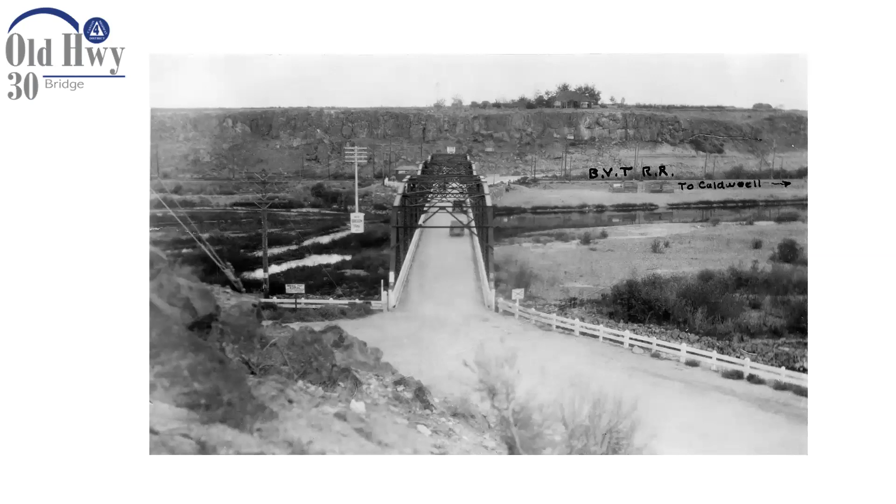I thought I'd start out with a couple of pictures. The team was able to obtain these, and this is one of the earliest pictures we know of the existing structure down there. As you can see, it has a very old coat of silver paint, and in this photo it appears the bridge has not been painted yet. You'll notice on the bluff above there's just one house and a few trees. In the background is Canyon Hill. And I don't know if you can read it, but this little sign says Old Oregon Trail. Very interesting little history here.

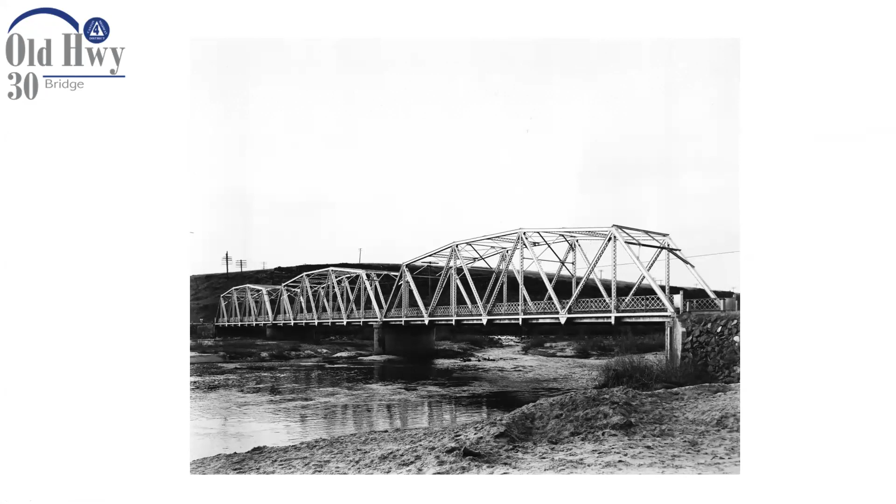Just a couple other photos - apparently they later painted the bridge, because now this photo shows it with the silver coating. There was actually a gas station down here on the curve called the Riverside Service back in the day. We don't know exactly when this photo was taken - someone with more knowledge of car history might identify the era of those vehicles, but I'd anticipate this was probably back in the 40s. Just a couple other views showing the whole valley back at that time.

So with that, a little bit about the project background. The existing bridge was constructed in 1922, so it's approaching its 100-year anniversary next year. It is what we consider structurally deficient, meaning it is eligible for replacement. We want to replace it with a new bridge to handle car traffic, but maintain the existing bridge for pedestrian use as part of the Caldwell Greenbelt system and pathway system.

I'd clarify that despite the bridge being structurally deficient at this point, it is also only used as a one-lane bridge and still can handle standard truck loading. If you're ever down there, you'll notice it doesn't have a weight limit posting, because it's still structurally capable of handling a full-size legal limit semi-truck. It is narrow, about 19 feet inside. It was originally, as you saw in those earlier photos, used as a two-lane bridge, but currently it can't really accommodate modern road width, especially with the striping we have providing bicycle and pedestrian access across the bridge to the greenbelt.

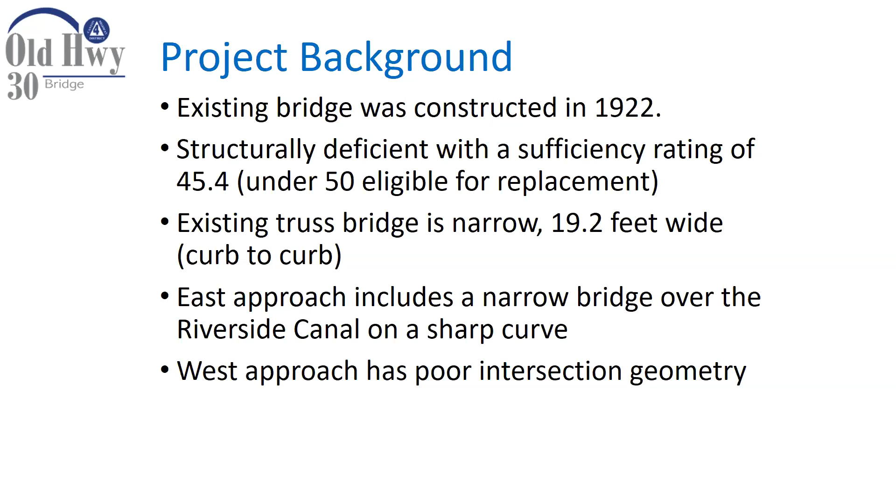A couple other issues we have with it: there's a narrow, smaller bridge on the east side, right on the inside of a curve, and we've actually had a semi-truck get hung up on that. That's problematic. Then on the west end, the way River Road comes into it is very poor geometry, and it creates problems and some confusion with drivers.

So the purpose of this project is to provide a structurally sound bridge over the Boise River, improve safety and access for pedestrians and cyclists, and improve the roadway geometry to meet current standards.

One of the other key things, especially as the area continues to grow - as many of you may be familiar, a lot of the roads parallel to the freeway system, like Overland, Franklin, and Caldwell Boulevard, are very important in carrying local traffic and become quite busy. That helps alleviate traffic from having to enter onto the freeway, because every merge on or off the freeway creates congestion, slowdowns, and conflict points where more crashes occur. So by providing a good, reliable local road system, it relieves the interstate from having to carry some of that traffic. For the future, it's an important aspect.

Currently, I think our counts on this road - last time we did them, a few years ago - showed the bridge was carrying about 1,300 cars a day, which for a one-lane bridge is a pretty significant number of vehicles.

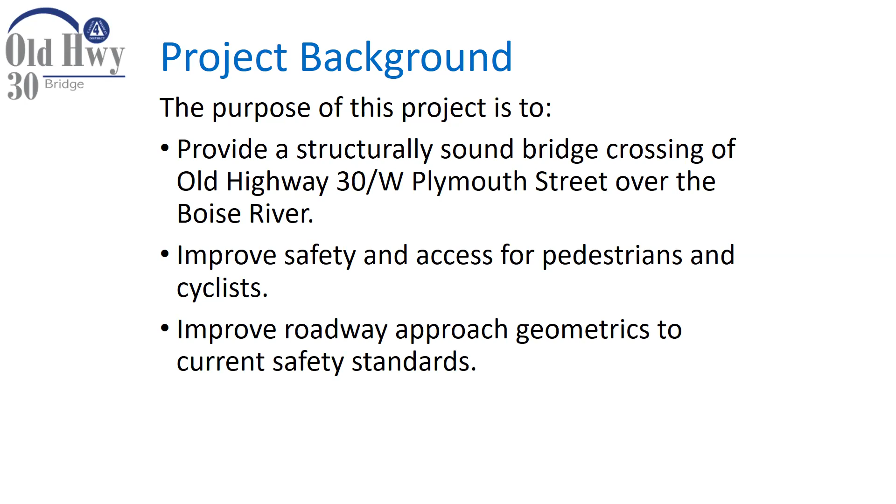The proposed project is to construct a new two-lane bridge at another location and retain the existing historic structure. It is on the National Historic Register, and our desire is to maintain that. It currently is being used as part of the Caldwell connection in the Caldwell pedestrian and bicycle path system, and we'd like to make it dedicated for that purpose. After the vehicle traffic is removed, we'll look at resurfacing it with something more friendly to bicycle and pedestrian traffic as part of that system.

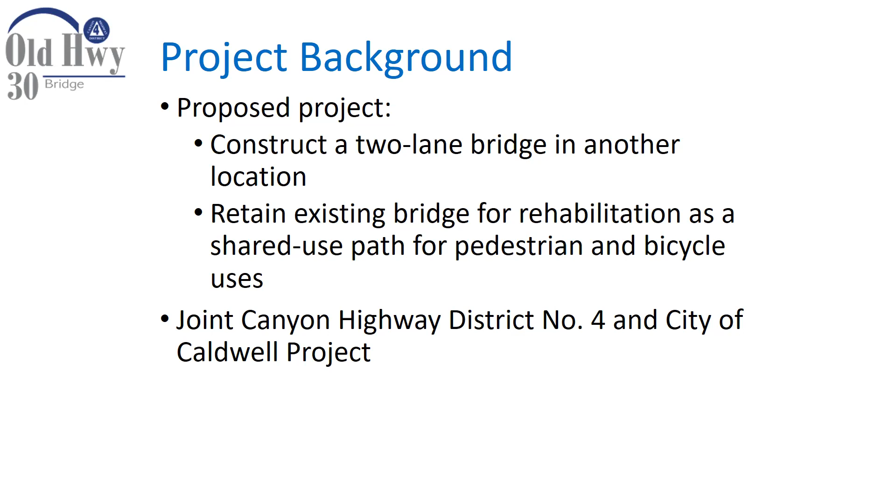This project, by the way, is a joint project of the City of Caldwell and Canyon Highway District Number 4. We're both participating in it equally and financially. The highway district, we are the managing member of the team, but the city is fully involved in the project.

So a little bit about funding. Liz had sent me some questions earlier that there was some interest in, so I wanted to touch a little bit on project funding. I actually made the application myself, and I was able to go back and couldn't remember when I made it. It turns out I made the application back in 2012, so it's been almost 9 years ago that we've applied for this project.

It takes a couple of years after it's approved to actually get in the transportation plan. So we were actually able to start really moving forward with the project in 2014, and I'll go through that a little bit more. The preliminary engineering, that is the design and environmental work and all the upfront items, has been funded, and that totals about $2.4 million. The federal aid portion is about $2.2 million, and our local share, rounded, is about $200,000.

Currently, looking forward, the remainder of the project is funded through two primary federal aid sources. One is called the Local Bridge Program, and that federal aid program helps to replace aged and deficient structures on the local bridge system, administered through the Local Highway Technical Assistance Council. That's really mainly paying for the bridge structure itself, and that program is contributing about $6.2 million.

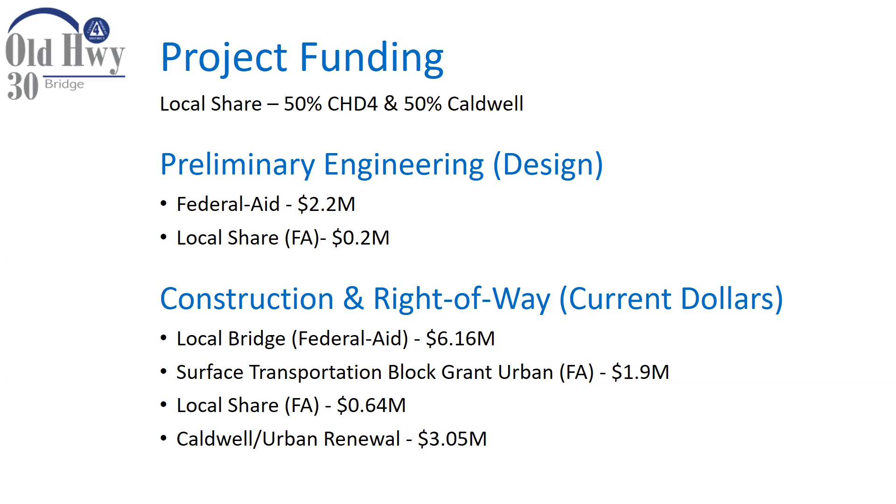The local share of these future construction and right-of-way costs is about $640,000, which will be split between the city and the highway district. Currently we anticipate a shortfall, not enough to cover the construction of the bridge. So we are working with the City of Caldwell and the Urban Renewal Agency. This project was included in the City of Caldwell's Urban Renewal Program, and through that program we are looking at using property tax monies that would have been received by the highway district had the urban renewal district not been formed. The city's urban renewal district has been holding that money and will apply it to the construction, which should help us finance the balance of the project.

Okay, so a little background on this. Like I said, we really got underway back in 2014 with our agreement with the state for the project. We went through a process of selecting a consultant, Forsgren and Associates, and their subconsultants, Bionomics and American Geotechnics, and negotiated a contract with them to do what we consider the concept phase.

The way we approached this project is, because it was fairly complicated, we broke it into two parts. One was the alternatives analysis concept phase, to figure out where's the best place to put it, and generally what it's going to look like. Once we knew that, we could better scope the final design, the structural design portions, and elements of the roadway design that take a little more detail.

So we started that back in 2015. We had a public open house in July of 2016 and presented our 4 primary alternatives, actually 5, because we always consider a do-nothing alternative. We received some feedback, and then had the concept report, which basically outlines where we're headed with the project and the basis for that, back in September of 2017. We then commenced the final design phase shortly thereafter.

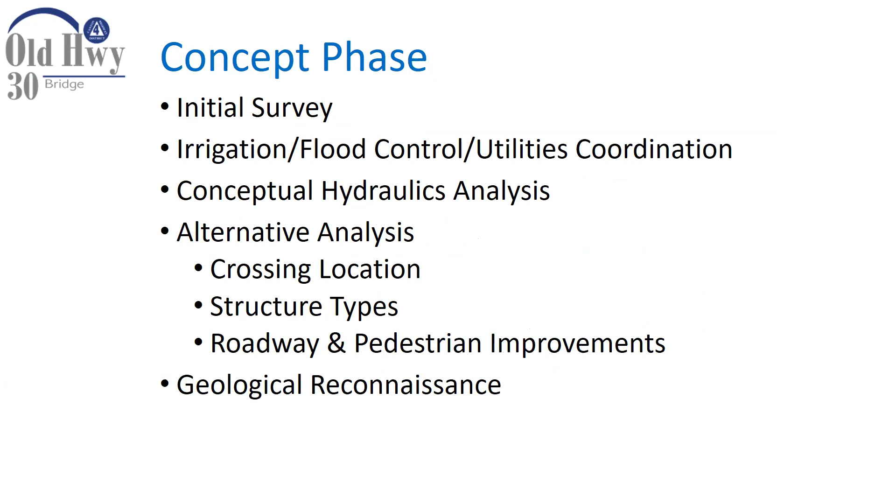Just briefly, the concept phase has a number of different components. It was looking at the whole picture: irrigation, flood, environmental issues, geology of the general area, and evaluating where we could reasonably put crossings. We conducted an environmental scan to see if there were issues out there we needed to address.

We also did our public involvement and some stakeholder interviews. I believe representatives from BREN were interviewed at that time. We had some newsletters going out, and then we held the public meeting I referred to earlier.

At this point I'd like to hit some of the highlights of what is out in this area. Hopefully you can all see this. It's probably a little small on the screen, but this is the existing bridge, Plymouth Street Bridge. North is up on this map.

This is the Boise River coming down here, and this is the Riverside diversion from the river into the Riverside Canal with their rock dam. It makes a hard corner, with bluffs on each side in this area. Just above the existing bridge is the Farmers Co-op diversion dam, diverting water into the Sebree Ditch, operated by the Farmers Co-op, as well as the Canyon Ditch right here.

This also points out the existing Caldwell pathway system, which comes up along the old Boise interurban route, crosses the existing bridge, comes down around and continues back along Town Circle, a local public road the district maintains, then connects back into the remainder of their system.

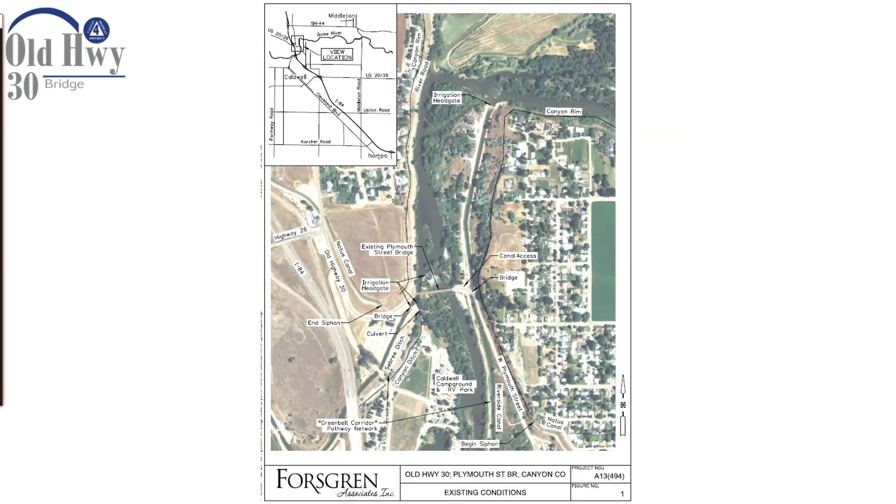When we originally did this, we had, I don't even remember, Steve might, 20 or more alternatives of various configurations, basically extending from the Interstate I-84 crossing of the Boise River to about where alternative 1 is, the most northern point. We looked at those initial alternatives and boiled those down to 4 primary alternatives, presented here.

These are what were presented at the public meeting back in 2016. As I was talking with Rob and Liz before the meeting, when I originally put the application together, just from a quick glance, my initial thought was the logical place would be to run it near alternative 2.

But as we started through this process, that was the engineer looking at the straightest line and best geometrics. As we started looking at all the other issues—cultural, environmental, the floodplain—we realized there were other alternatives that were very viable, and boiled those down to the most realistic ones representing the primary alternatives out there.

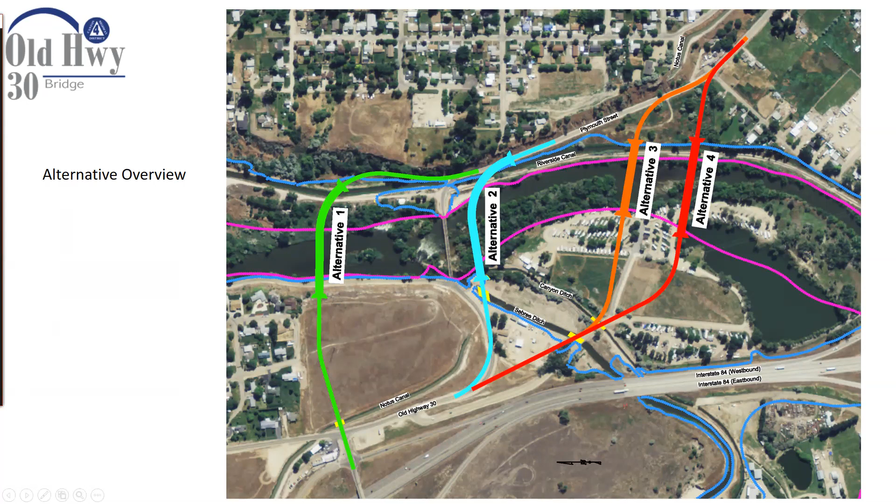Let me just walk through these alternatives quickly with everyone. I do appreciate Steve Waldinger put this together for a presentation some time ago and shared it. A lot of these, especially these graphics, were work he had done, so I appreciate that—these are very helpful.

The nice thing about alternative 1, which was not something I originally considered, is that it's basically an extension of Highway 20/26, coming right over the top of I-84 here. This would take the road directly out and over this undeveloped knoll to the east of Old Highway 30, which currently crosses right here.

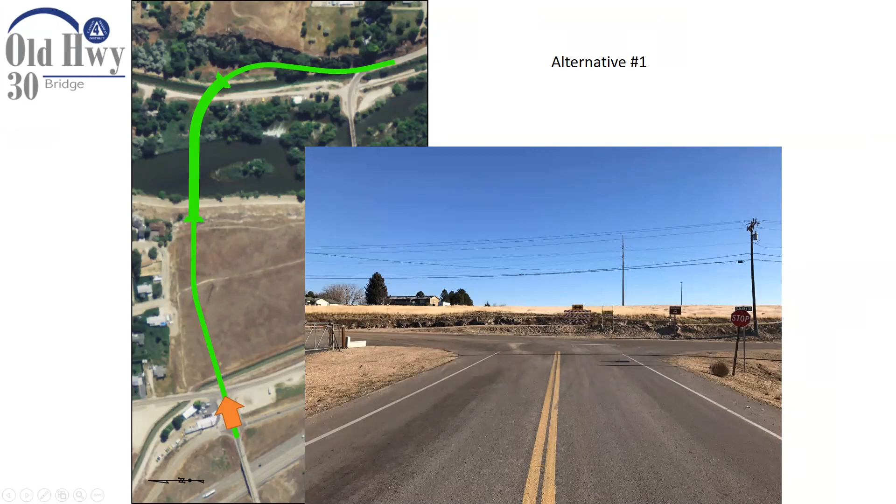This photo shows the bluff along this alignment where the bridge would take off, quite a ways above the river—about 40 feet of clearance, I believe—and come down and land on the far side. One of the questions in this alternative: I'll tell you this was the recommended alternative, so I'll talk more about it as we go.

There are a couple things here that might interest this group. The bridge will require some pilings in the river—columns, abutments. The first abutment will be up here on top of the bluff. The first pier is intended to land on the head of this bar, which under most normal flow conditions is outside of the river flow.

The next pier would fall on the far bank, also outside of the water under normal flow conditions. This area doesn't flood until we get up to about 7,000 to 7,500 CFS. The far abutment would land back over here by the existing canal road, quite a ways back.

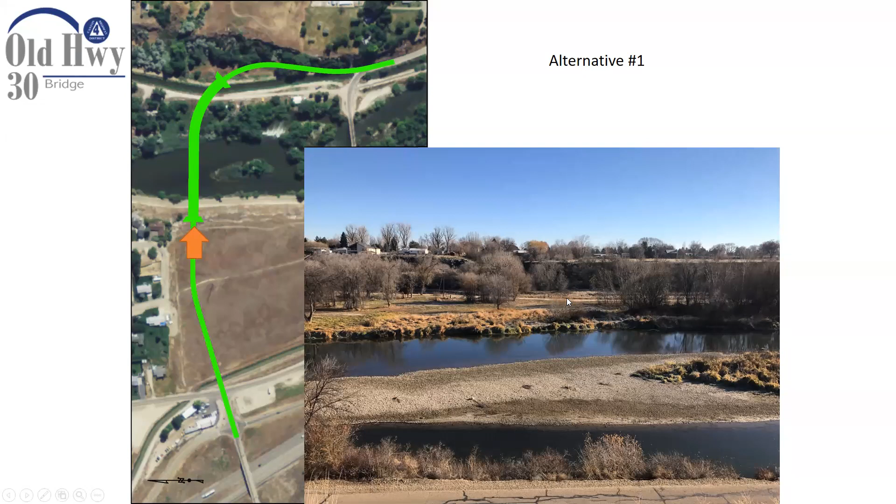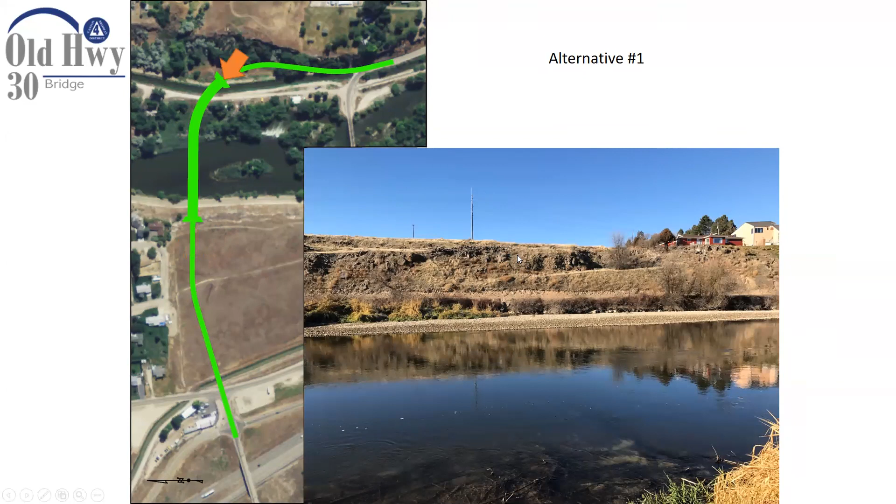This is looking from what would be the bank, back across the river. The top upper abutment would be here on this basalt cap, coming across, and the other abutment would fall here. This is the Riverside Canal, which would be piped through the project, and a fill built over it, with the road then turning and tying in down here with the existing roadway.

There's our tie-in point. It's very close—we'll probably have to taper the road a little ways to match in, but generally it will be near the point where this existing curve kicks off.

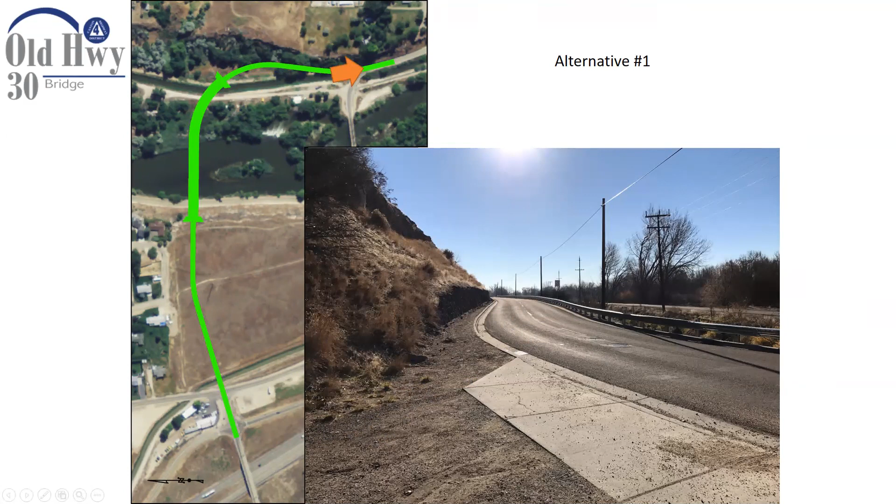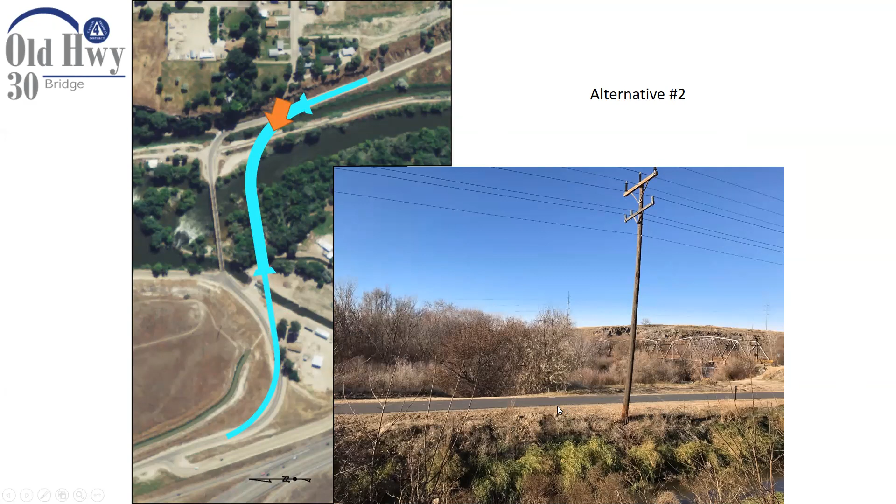It would also cross over, and we may have to make accommodation for the Caldwell pathway system on both sides of the river for this alternative. Then we would be tying back into the existing Plymouth Street.

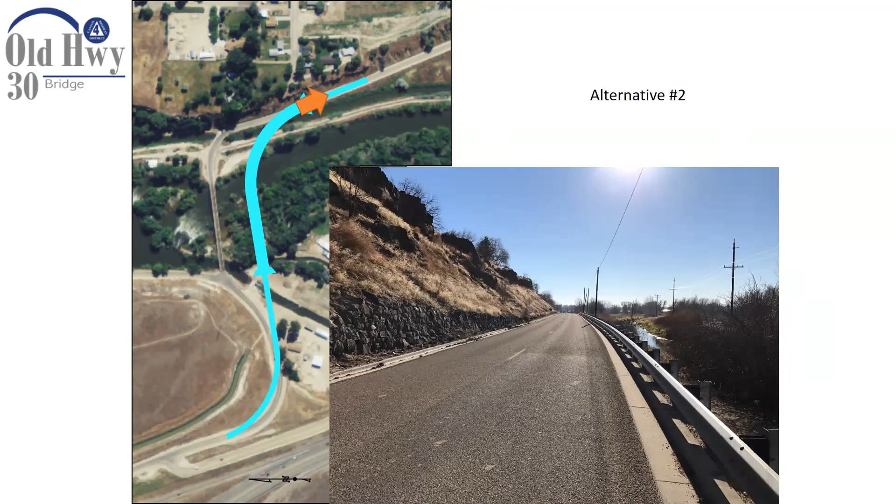Alternatives 3 and 4 are similar. This was the initial alternative that provided the shortest span with respect to floodway limitations, but as you can see, it goes right through this RV park, which has some longer-term residents. They're not permanent, I guess, but fairly long term, and that is a concern for social justice issues when we evaluated those.

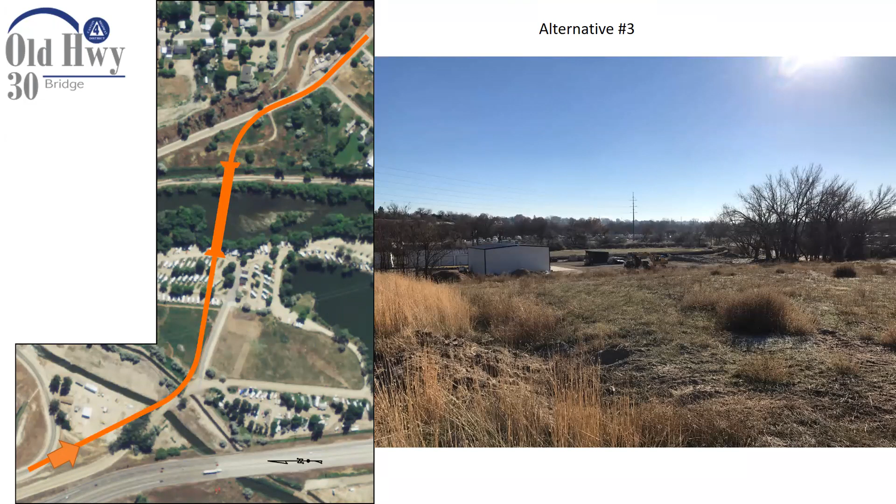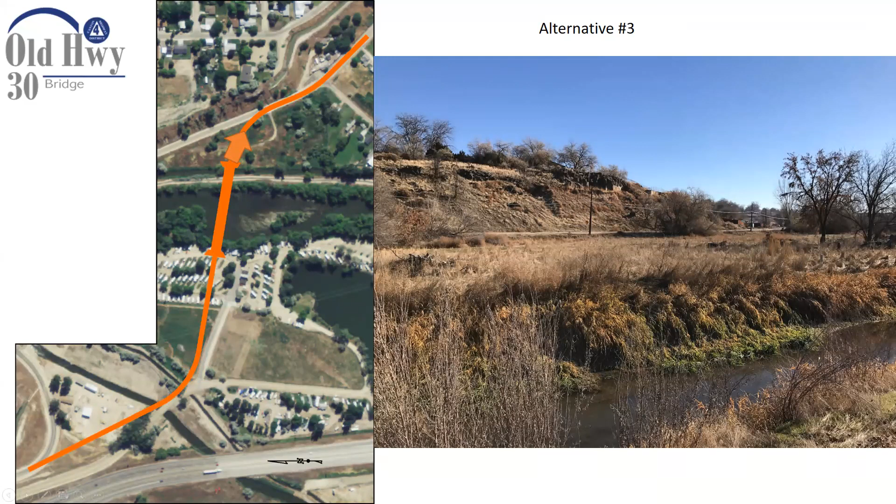Just some pictures—this alignment would basically cut through the middle of this, and it would also divide this piece of property in two, which is also not really desirable. It has the same issues with crossing the Caldwell pathway on two sides and having to make provisions for that before touching down. It also has some forested wetlands, not as much I believe as alternative 2, but it did have some wetlands impacts.

Alternative 3 was developed with a little bit longer span, trying to avoid as much impact on the RV park property. When we shifted it to the south, this created a much longer, more costly span, and in the end it still had a significant impact on this property.

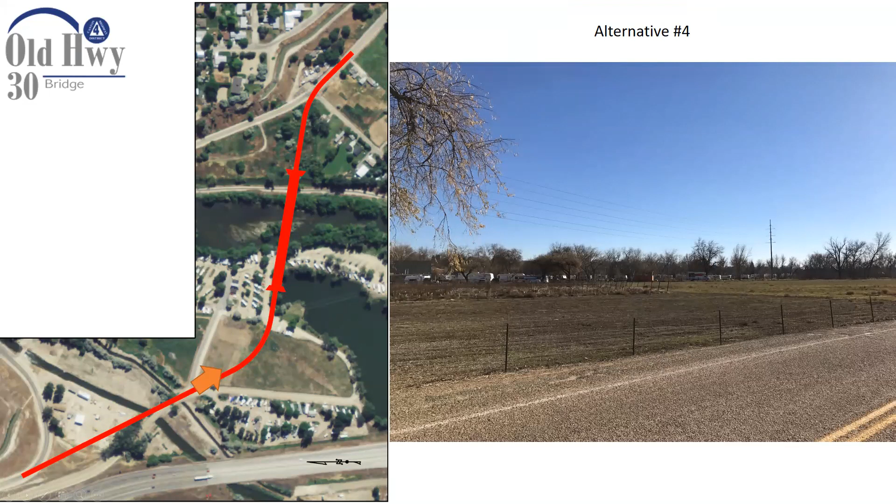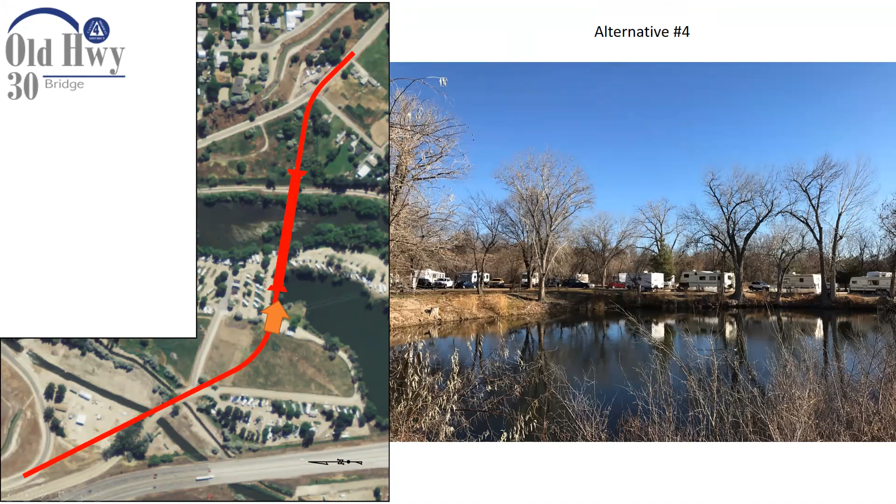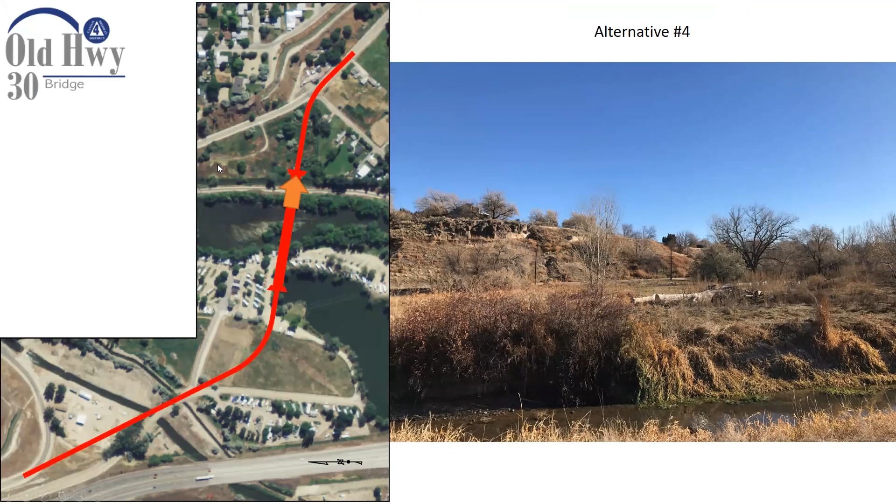Although not quite as much as alternative 3, it was still fairly significant, with some impact on forested wetlands as well. Here's a view looking ahead on that alignment. This alignment, not as much, but alignment 3 previously also had the issue, because the siphon we had for the Notus Canal was underneath that alignment, and then it would tie back in.

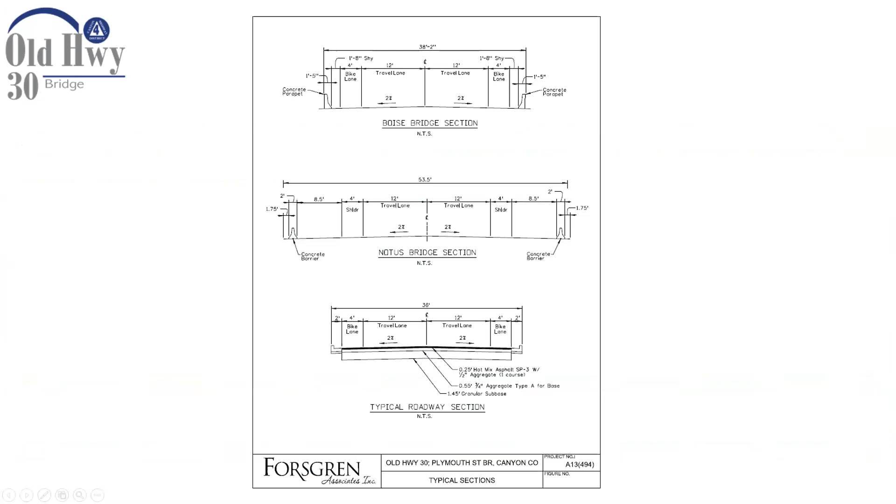This alternative does have a little more land impact. It was rated lowest there, but the caveat is that the land in this case is mostly undeveloped land owned as right-of-way required for this, from the Farmers Cooperative Ditch Company. It's undeveloped dry land on top of the hill. There is some right-of-way, if I can go back here real quick, that would be required on the east side of the river.

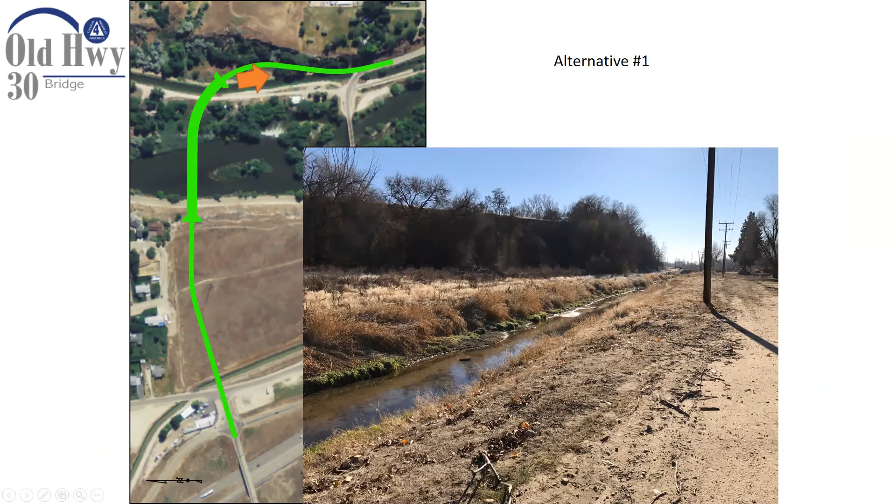This land down here on the bottom is now owned by the city of Caldwell, and will become a Caldwell addition to the Caldwell Park system, as well as their Greenbelt system. The bridge here is planned to be 16 feet of clearance, so the pathway would be able to go underneath the bridge in this area. There's no development here, and only a little additional right-of-way would be required at this location. So even though the land impacts on alternative 1 show as a 4, they're really not as impactful as some of the others.

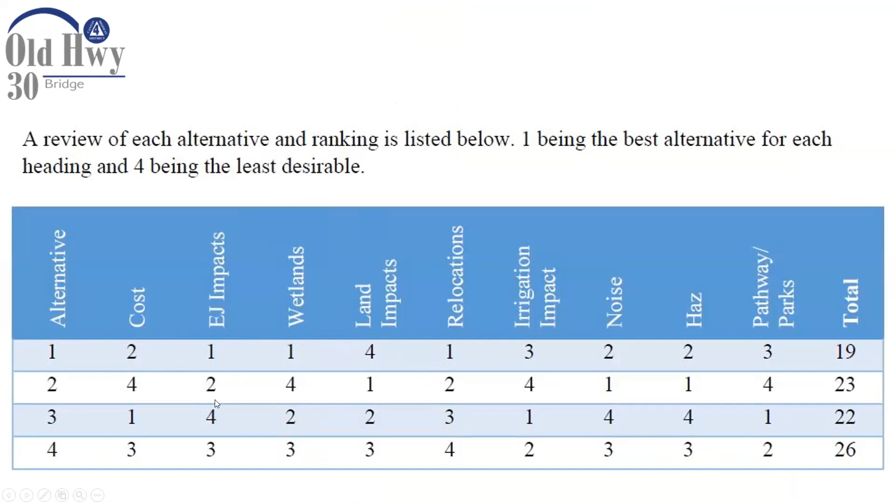For those reasons and several others, I'll walk through them. The recommended alternative, number 1, was chosen to move forward for those reasons, also to avoid the higher risk irrigation facilities, and to provide good separation completely with the bicycle and pedestrian pathway system, which would continue to be able to function and use the existing bridge without the road impacting it. It also had the least impact on forested wetlands.

It also had some of the least construction impacts, in that it would probably require the closure of River Road underneath it during construction, but there's a traffic detour to the existing Old Highway 30. Other than that, the tie-ins on each end would be pretty straightforward, so we'd have pretty limited access impact. The existing bridge could remain in operation for most of the construction of this alternative as well, and it really avoided impacting developed lands, as already mentioned.

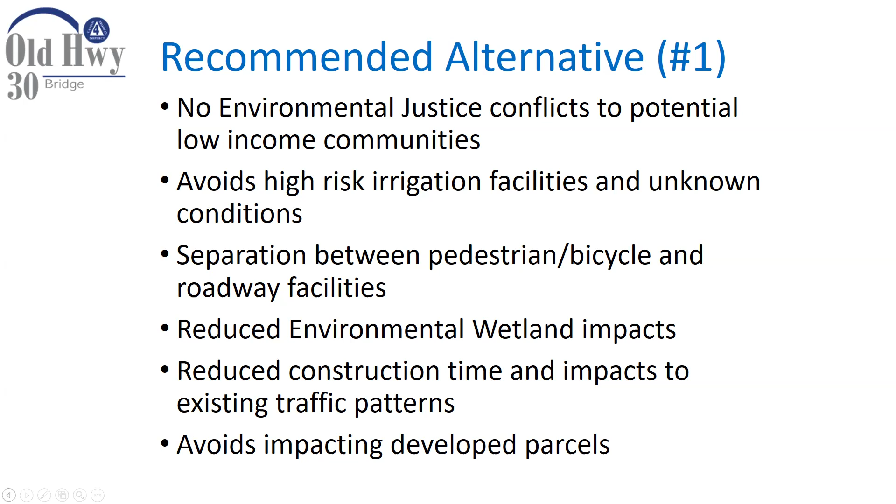So where are we at now? As I said, we've done all this work, have our recommended alternative, and are now moving through, starting to look at the more detailed design.

Steve might be able to join us and comment on this, but I believe the preliminary hydraulic findings show that just the one pier in the river has no significant rise or impact on the water surface height. Being in the canyon, it's actually between those two diversion structures, so the river is fairly confined and geomorphically probably doesn't have a lot of room to actually move bed load and change and be an alive, active river, unfortunately, because of those two confining irrigation diversions upstream and down. So we are just really getting into the preliminary design.

That's scheduled to be done in December of this year, at which time we'll hold a public hearing on the project, being able to provide more detail that we're going to be working through on the bridge layouts and so forth. Our environmental approvals, we're looking at August of next year, at which point we'll then be able to begin with right-of-way acquisition, which we have scheduled just a little bit less than a year to do, and we'll be able to finalize the design and be ready to go out to bid for construction around August of 2023.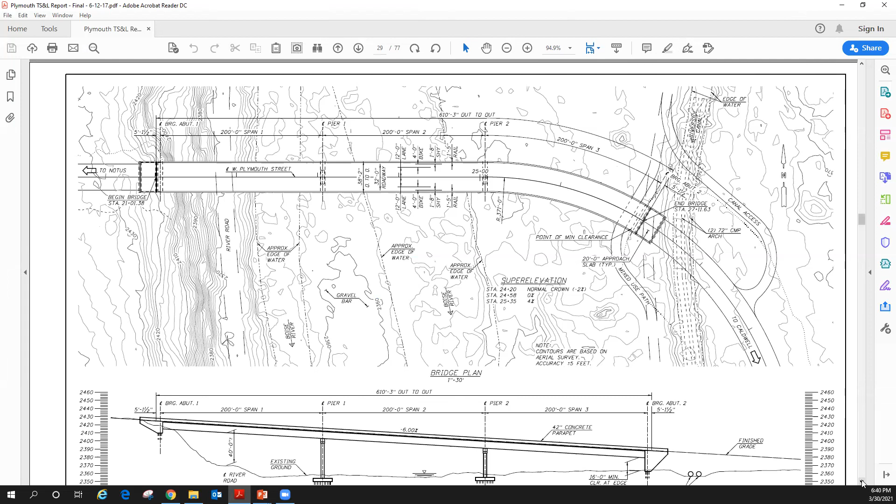I was going to pull up— Liz, can you see this display, this engineering drawing? Yes, it looks great. I mean, it's hard to read it, but it's there. Good. So I just want to share this as we've started through.

And so this is the bluff. This is River Road right here, for those of you familiar with it. And the river lies right down in here. It's normally confined between here and about right here on this side. So the bridge would be quite a ways above the river, probably in the range of 30 or more feet where the normal flow is.

This is the rock bluff on the west side. We'd have a continual down gradient, and we'd still maintain about 16 foot of clearance. And here you see the future—this would be a Caldwell Pathway Committee, Caldwell project—but we would provide for this mixed use path. We'd easily be able to clear it underneath the end of the bridge.

And this would be the far abutment right next to the existing Riverside Canal, basically on the access road for that. And we'd provide a new canal access down for them, and this section of the Riverside Canal would be piped through the project. So hopefully that gives everybody a little bit more of a visual of it.

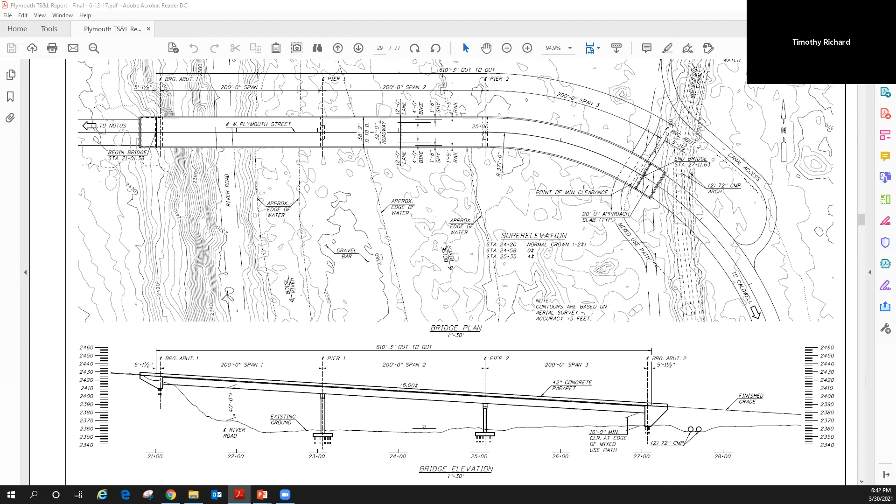I'm sorry if you mentioned this, but are you anticipating an increase in the amount of traffic on this road, on the new bridge and the road? Okay, I'm going to turn on my video here, see if it's going to flicker on me or not. We'll see.

The answer is yes. I think that as with any roads, all of our roads, we've been experiencing—I did an analysis a couple of years ago, and we are experiencing about a long-term average right now in our district of about 3.3% annual growth rate on our roads. Some areas have seen higher than that. So the answer to your question is, I think with growth, we're seeing growth on all of our roads. I would expect growth on this road as well. I don't remember the projections we were looking at on this for the 20 years, right off the top of my head.

Okay, so there's a question: will the highway district send out notices for the public hearing? And these are neighbors, I think, that are up on the highlands.

Or how can people make sure they are notified, Tim? Great question. If they provide their contact information, we'll add it to our database. I think when we did our first public meeting, we sent out, if I recall, around 4,500 notices. So we will cover this whole area and make sure that people get notices. But if they want to specifically be on the list, please email your contact information to me, and I will get it in our project records. We have a database of all the stakeholders and interested parties, so we can make sure they're notified. And we'll go through a public notice process also with that, where we'll get some information out on media as well.

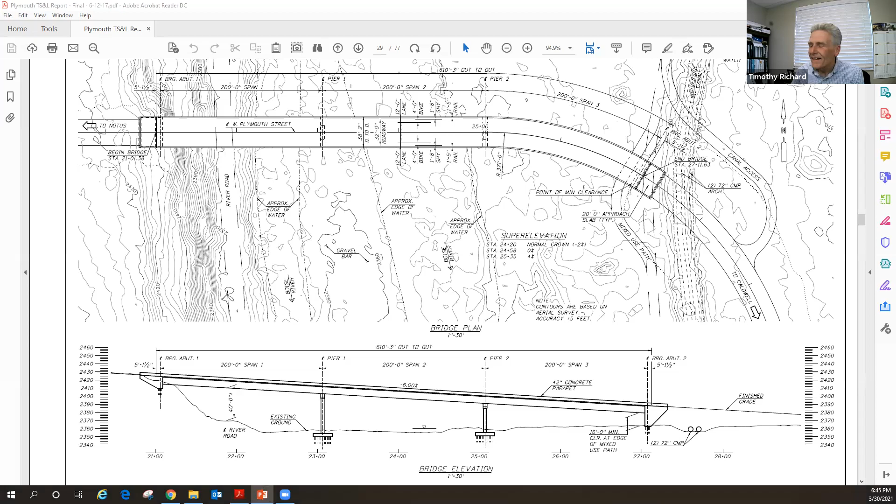Why don't you type your email address into the chat, Tim? Okay, while I'm sharing, a comment from a neighbor up in the Highland area - they think noise will increase. So what have the studies shown on noise and wildlife disruption? And it's going to hugely change the visuals. You might not notice it so much if you're floating the river and don't look up, but if you're above it, you'll certainly notice the difference. And how are those concerns being addressed?

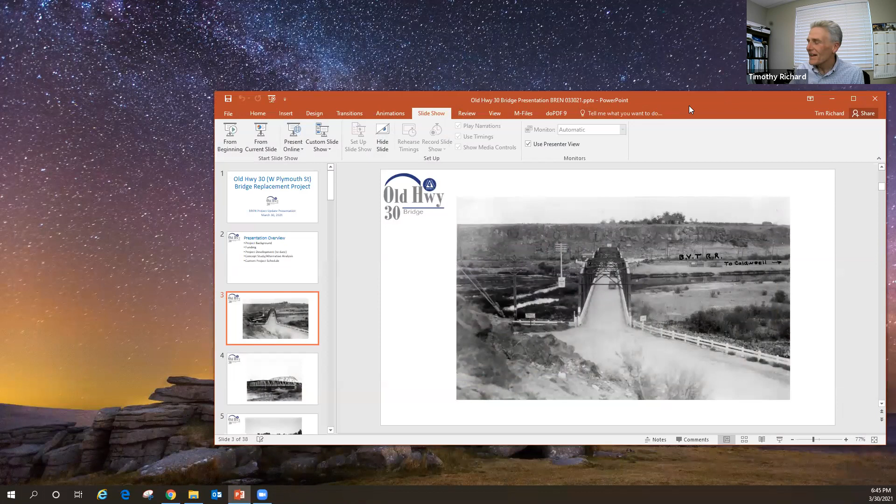And you can, if you're going to share more, fine, and if not, you can stop sharing your screen. Yeah, that's what I was just looking here to see if I could do. I'm not sure - for whatever reason the controls are not coming up. Oh, I don't want to do that. Let me, before I do something - oh, here we go. Do you want me to stop sharing?